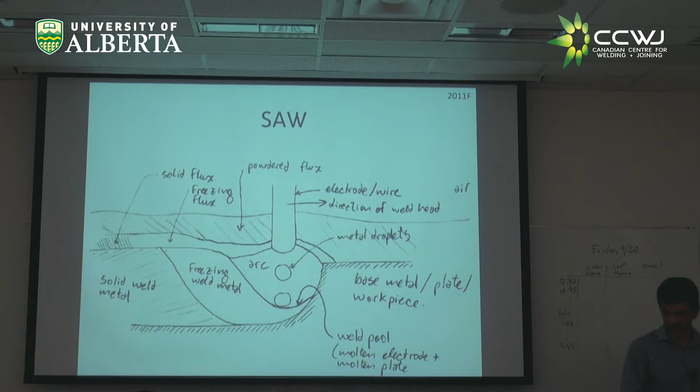For the grad students here, among other things, not only am I late, but when I was in a rush trying to get my hard drive, I left behind, I prepared a sheet. For the grad students, we need to assign projects for you. And with 2 of you, I already talked, but there are about 9 left.

So this Friday, tomorrow, I'm going to make myself available. And I would like to meet for 15 minutes with each grad student. Not you, because we already met. Not you, but there are many others. And I just want to get a sense of what you like, what's your research. The project is still going to be closely tied to the fundamentals you learn in the class. But if we give it a spin that is good for your thesis or things that get you excited, everybody is happier, right? So tomorrow from 10:30 until noon, and then from 1 until late in the day,

if you guys want to sign your name, like I asked Daniel to prepare this sheet, so I know what to expect. If for whatever reason you cannot make it on Friday, let me know. But if you can make it tomorrow, good, we get done with that. All right, and you can get started earlier. You might need to learn some of the material I'll teach later. But grad students are good, so it shouldn't be a problem. And it should be an awesome thing.

Very often, those things are really good hooks for future employment. Because you say, I did this. Oh, I cannot believe you did that. Oh, yeah, sure I did. So, all right.

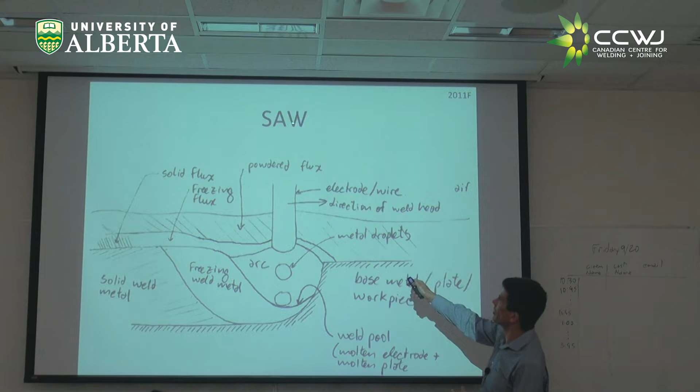And then we moved on and said, okay, fine. We have an arc, like TIG, but we're melting the electrode, like MIG, and we're protecting it with fluxes, right? And it's something that is new. And if it is fluxes, we talked about flux core, right? That we use the same machine as MIG. It looks everything the same as MIG, except you can get away without putting a gas, right? And you would have a good protection for the melt. And then we said, okay, there's something else similar to MIG and similar to flux core, that is submerged arc welding. So is submerged arc welding done underwater?

Oh, I see hesitation. No, it's submerged because it's submerged under fluxes, all this bed of fluxes. And I didn't get to show you some videos, but I'll show those to you today. So it looks like MIG in many aspects. You have a solid wire, right? You have the weld pool, the weld here, right? It looks like flux core too, in which the melt is protected by fluxes, right?

Flux core is always a tubular wire. Submerged arc welding can be tubular, might not be, right? So this here is just powders. And you will see all this in action. So this drawing, which is of my authorship, is somewhat artistic, but you're going to get to see the reality, right? And it's like flux core in the fluxes. The wire here can be many things, as long as we protect it with the fluxes. Now, the fluxes we can mix with metals, and we can make alloys. So we can make crazy stuff with this process.

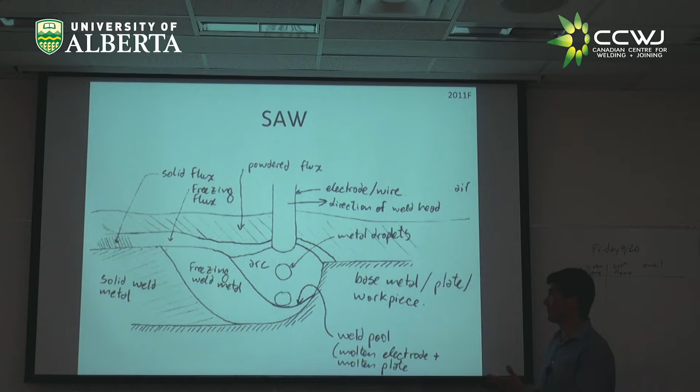So I mentioned to you something about how, since the fluxes have chemical reactions with the metal, you can add oxygen, you can take oxygen away, or phosphorus or sulfur, a bunch of things. So there's this term called basicity. I mentioned briefly to you that it is like a legacy from the steel-making industry, in which, depending on the chemical composition of the fluxes, they call it acidic or basic, but it has nothing to do with pH. I don't know why they call it like that. I asked. Nobody gives me a straight answer.

Yeah? It's just because it makes the ratios easier. It's just ratios. They just called it that because of the ratios. Yeah, but if it is just ratios, there are so many other ways to call it too, right? It's true. It's because of the ratios of different types of fluxes. Why acidic and basic beats me. But they're called that way. There's nothing to do with pH. Nothing to do with pH.

Something else is called neutrality. That means if you're going to have more, you're going to change your manganese and silicon content in your alloy. Now, as a preview, manganese and silicon are special because they are very reactive with oxygen. So if you have a plate that is rusty, you can weld on it without problem if you have an alloy that has high manganese and high silicon. Now you might say, why would anybody want to weld on a rusty plate? Well, the answer is everybody wants to weld on a rusty plate because it means you can store it outside and you save money without having a shed, and you can weld it without having to clean it. That saves time and money.

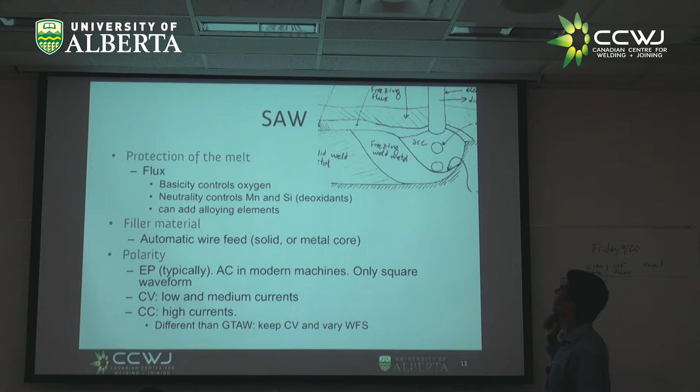All right, so subarc welding is, remember I said TIG is like a scalpel, MIG is like a knife. This is like a chainsaw, right? So it depends on what you want to do. Do you want to do brain surgery or you want to chop down a tree? You don't use the same, right? This is for chopping down trees, right?

You want to make enormous plates, you want to weld a ship, you want to weld a bridge. Subarc welding is the way to go. TIG, no. TIG is you want to make a race car, right? Very different type of things, although both are based on arcs, right? The only one that can make bigger welds than subarc welding is electrogas welding or electroslag welding.

Why do you think electrogas welding, which you know what it is, can be bigger than subarc welding? Why? Why can electrogas welding be bigger than subarc welding? Do you remember electrogas welding, more or less? Used to weld ships. Like subarc welding is also used to weld ships.

In electrogas welding, do you remember how we went? Like we would put these copper shoes and move up, right? And it's like a swimming pool of molten metal. So why subarc welding cannot be as big?

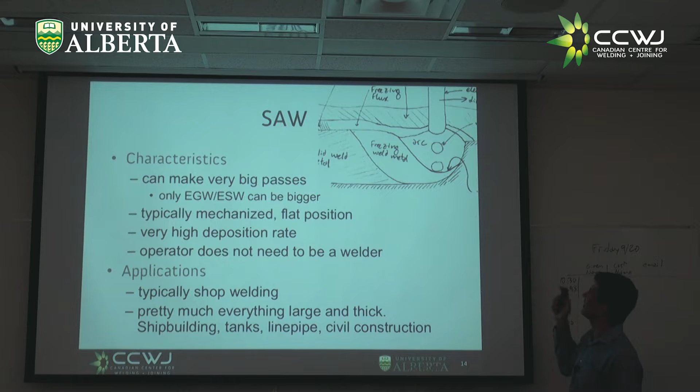Let me show you the video on subarc welding here. We're training videos. Oh, hold on. Wow, I'm having a special day today. Okay.

Thank you. Let's go.

I don't want to see any iMovie. Consumable. There we go.

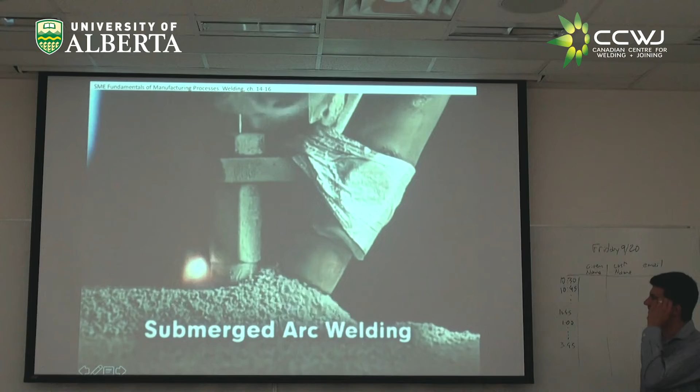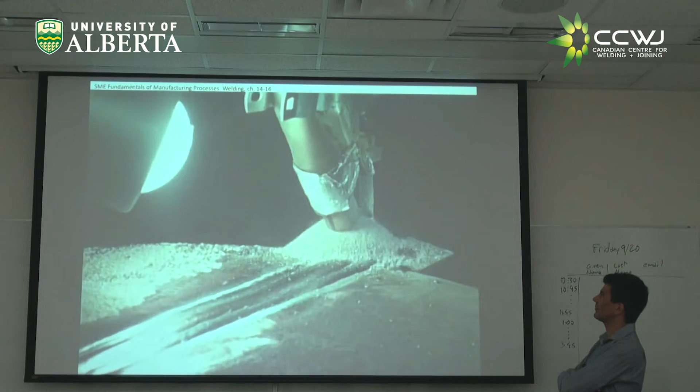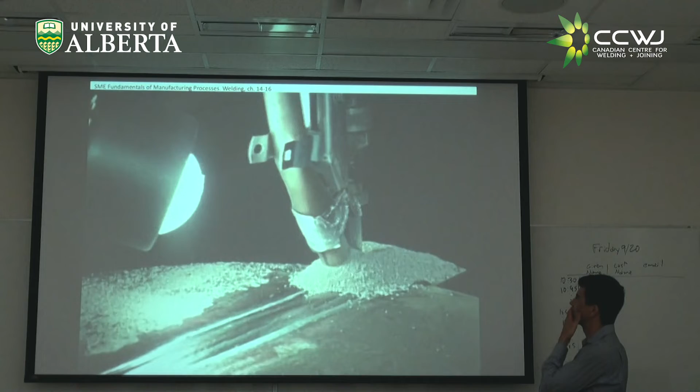In submerged arc welding, a bare, continuous, consumable electrode wire is fed under a layer of granular flux. When the arc is struck, the tip of the electrode is submerged in the flux, and the arc is not visible. Welding proceeds without the intense radiation that characterizes open arc processes, and with little fumes.

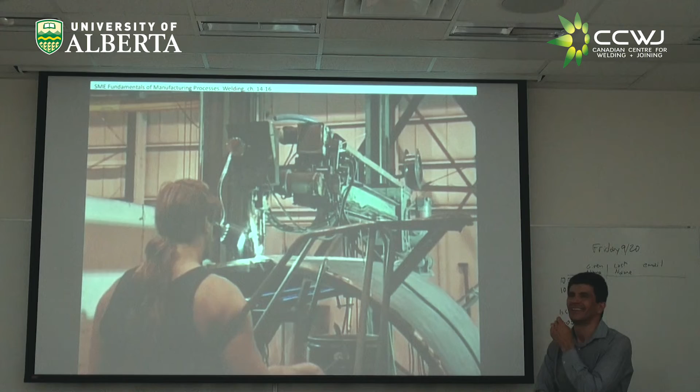The submerged arc welding process varies from semi-automatic to fully automatic. No safety glasses, no special jacket. It uses wire feed devices and joint tracking systems to move either the welding head or the workpiece.

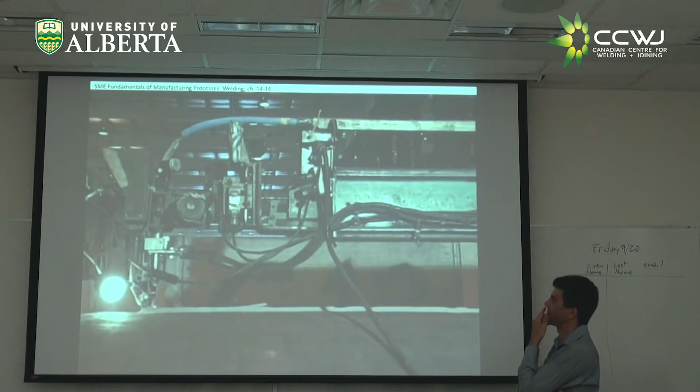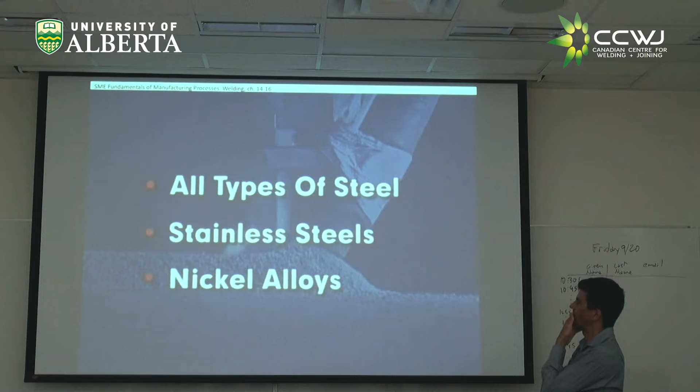Submerged arc welding is commonly used to join all types of steel, stainless steels, and nickel alloys. All right, awesome. So, steels, stainless, nickel. How about aluminum? It didn't say aluminum, so the answer is no aluminum. Why? Because it can be easily oxidized. Exactly. Thank you so much.

When you have these fluxes, there are chemical reactions. Fluxes are typically oxides. Well, aluminum will steal the oxygen from everything except titanium. So if you want to do subarc welding of aluminum, it's not going to work. So you might say, how about something that is not oxides, for example, fluorides? We have tried this in the lab, and every few years, people come with their grand idea of subarc welding of aluminum. That would be amazing, so useful.

But fluorides are very hygroscopic, so they absorb humidity, absorb moisture. And if you have moisture, then you have hydrogen, and hydrogen is very bad for aluminum too. It doesn't give you cracking like in steel, but gives you porosity. So subarc welding, which is super important, is essentially constrained to everything iron or nickel base, because of the reactivity of the fluxes.

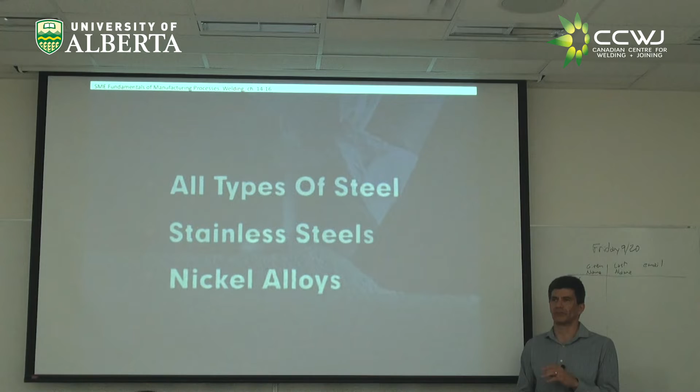Having said this, what do you think of flux core of aluminum? That doesn't happen either. That's another thing that every once in a while somebody comes with a bright idea. It's not happening. However, there are sticks. When we get to stick welding, there is one flux-based process for aluminum, but it's so uncommon. All right, let me show you. This is from our lab. So this is a machine you'll see.

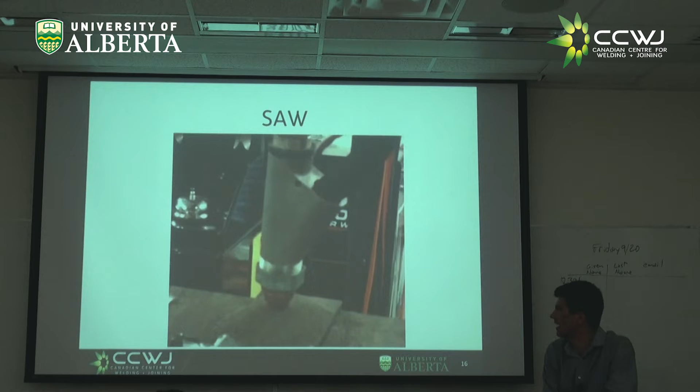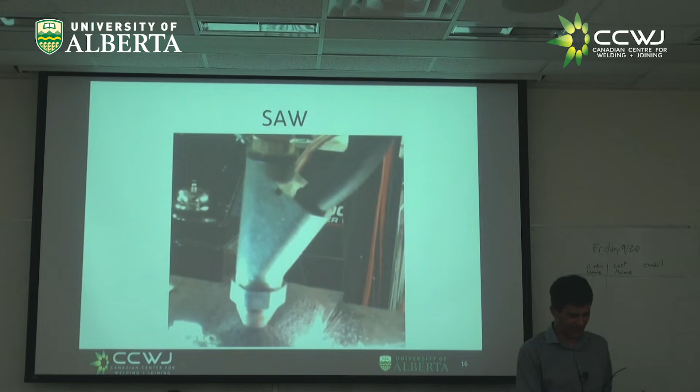You see, in our case, you see no flame. We didn't have a big flash to start. Okay, I should stop it here. That doesn't matter. That was part of an experiment. So, you see, we were doing something that I'm going to show you now. You saw that it was about to explode? That's why it looked like it was about to explode.

So, subarc welding is so similar to MIG. You have droplets that come from the electrode to the weld pool. Is that globular or is it spray? What is it? You have no idea because you can't have any idea. And nobody has an idea, but we do because we did these experiments in the lab.

So I'm going to show you a video that is a super big deal because some people in Germany had done videos like this in 1960, when was that? It was 50 years ago. I think it was 1968, or maybe earlier. And then nobody could do this again. But we did it. We had a guy coming from Germany, and in 1 week of working together, we did this. It's a major breakthrough.

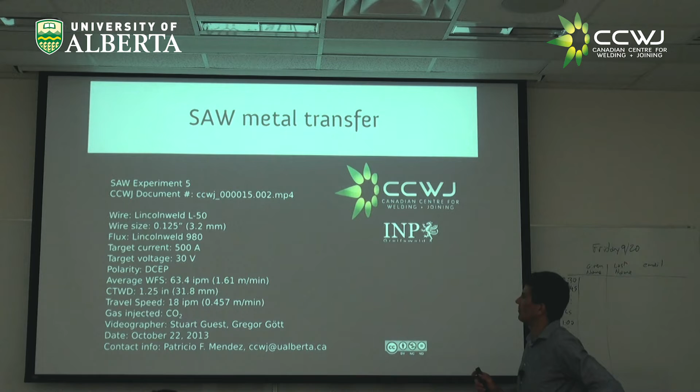So I'm going to show you a video of metal transfer in submerged arc welding. This is just to whet your appetite, because in a metal transfer lecture we're going to have, I'll show you much more. So metal transfer in submerged arc welding. So this is a droplet. This is a wire. This is 10,000 frames per second. So this has been slowed

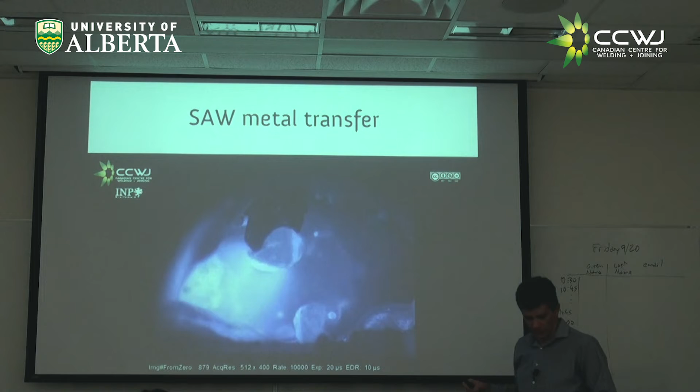300 times. This is 300 times slower than reality. This is a droplet. You see the wire now is molten here. Here you have the arc. Here you have the weld pool. This kind of thing you see is part of the trick we did, in which we put like a little tunnel to see inside. And when you start to see the sparks flying in the video that I stopped, it's because the sparks were coming out of that tunnel.

So now it's funny. To some extent, this would qualify almost like globular. You see the fluxes, the dry fluxes coming from the top. But you cannot compare this with globular transfer in MIG, right? In MIG was this beautiful big droplet, would go a little bit to the sides. But now this droplet is big, but it's not too beautiful. It looks like a horror movie type of amoeba monster, right?

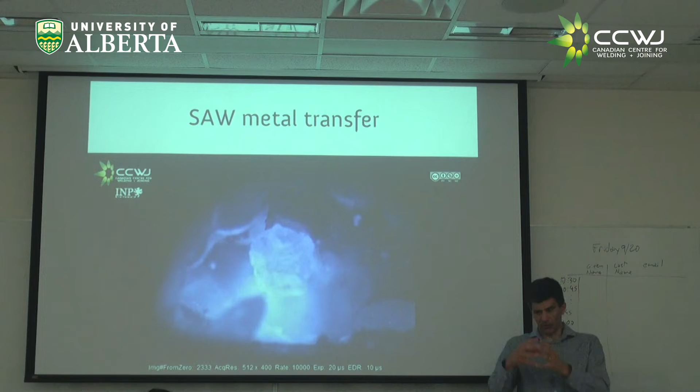So this is important because it informs us of many things. One is, how is the metal moving? Does the metal fall straight or make a bank shot against the molten walls of the fluxes, right? We also get to see what your arc length is, because you can set the contact tip to workpiece distance. Do you remember what that is? From the contact tip to the plate. You do that. But once you turn on the arc, you don't know how that distance is divided between arc and electrode extension. But now we know, because we're measuring it, right?

So we did so much scientific work with this. We got to learn so much. And then, not too far after we did this, some submerged arc welding machines started to come with waveforms. But to develop a waveform, you need to know what's happening to the droplet, right? And they wouldn't do it because they have no idea what's happening to the droplet. So I don't know how much use they put to our videos, because in industry they're very, very secretive.

Let me tell you an interesting story about this. I visited Japan for a conference a couple of years ago. It was after we published this paper. And I'm happy in my conference in Tokyo, and they said, would you like to come see our company? Yeah, sure, why not? Okay, now they put me in a car where they kidnapped me. They take me to one place that was an hour and a half away from Tokyo. And they put me in front of this welding machine, right? A sub-arc welding machine.

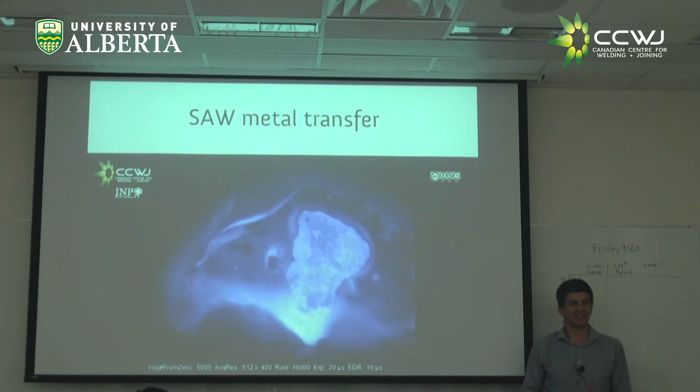And they start asking me all kinds of questions about this experiment. It was funny. I felt like being interrogated. But that means that somebody once cared about one thing we did in the lab, right? As an academic, that so seldom happened. So I was very happy. But this is a big deal you get to see here.

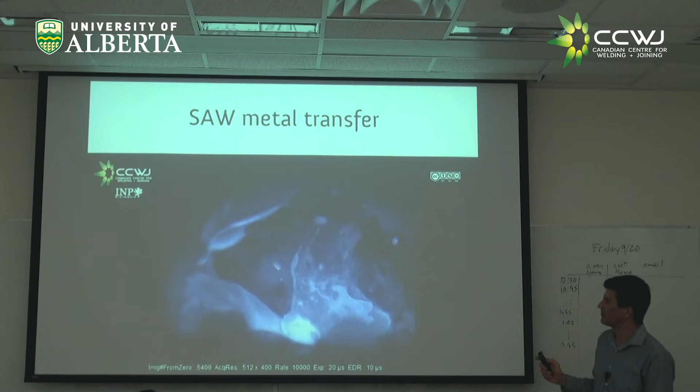All right, true or false? False. If you remember, sub-arc welding is massive, right? It's a chainsaw. MIG is like a knife. Very, very different, although they're so similar. And again, everything has an exception. If you wanted to do submerged arc welding at 400 amps, yeah, you can do it with a MIG machine, right? It's not designed for that, so you have a few challenges, but not insurmountable. Similarly, you can do gas metal arc welding with sub-arc welding, right? But again, the machine is not designed for that. You can make a gas nozzle, but it's never going to be as good. And if you say, well, but I wanted to do it at 1,000 amps, I say, good luck with your shielding, because you're going to have this enormous tail that you cannot shield with the gas. So things are there for a reason.

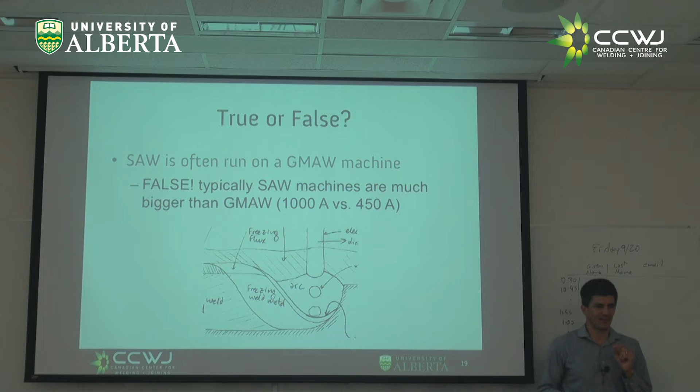So as you see, for everything I tell you, you can prove me wrong with one example. So I cannot give you a universal law for things. I can only talk about typical things. Here you have an exception. Isn't that cool? So you can do anything you want with welding. Yes, as long as you can pay for it.

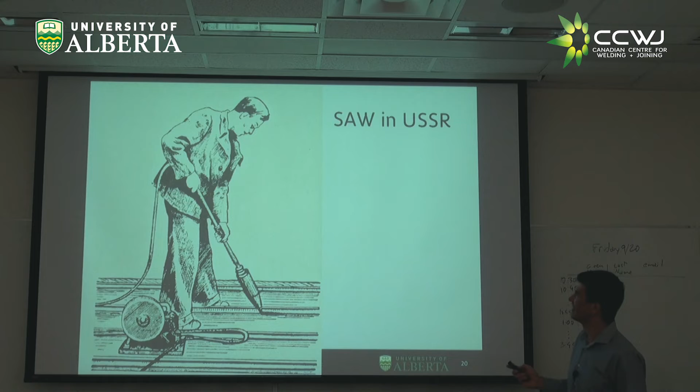All right, electroslag welding. So now, electroslag is to electrogas what subarc welding is to MIG, right? So MIG, I melt a wire, cover with gas. That's same as electrogas. The difference is one is enormous and one is controlled. One is a swimming pool with 4 sides, and the other is controlled by capillary forces.

Electroslag welding is the same as submerged arc welding, except it's massive. So you make this swimming pool of weld with 4 walls. Now, that wasn't completely true. There is one difference between electroslag welding and submerged arc welding, and it's very important.

You have fluxes. You have a slag, you have molten metal, you have the copper shoes. Same thing. The fluxes are the same as submerged arc welding. However, electroslag is typically classified as an arc welding process, and that's why I put it here. Guess what? You have no arc. No arc. But you still run current.

It happens that some fluxes, when they are very hot, become electrically conductive. So you run the electricity from your electrode to the molten metal, and you melt the wire, just as you did with MIG or anything else. But you have no arc. So fluxes that would give you this type of performance are very high in fluorine, or fluorides, which are not oxides.

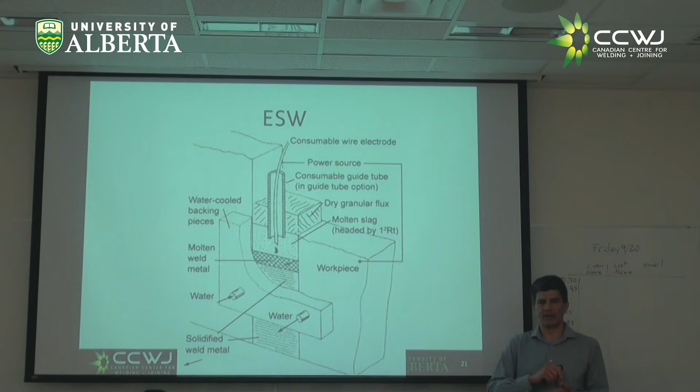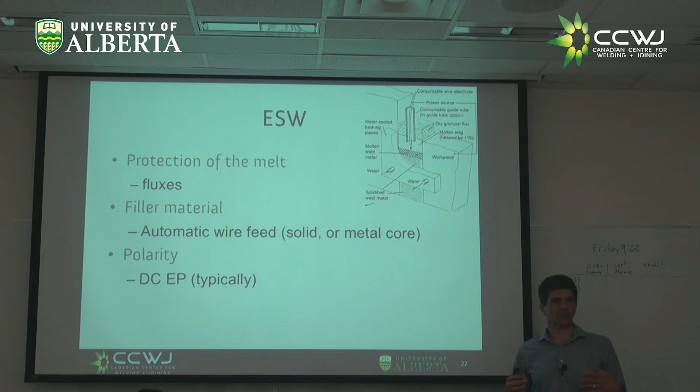In a single pass. You can weld enormous welds, making many, many passes, but in this one, you get to do it in one pass. So protection of the melt is fluxes, not a gas. You have automatic wire feed, which can be solid or metal core, and the polarity is typically electrode positive. This is a common welding procedure for enormous things, like I mentioned before, ship and bridge construction. This is not a weird process. This is used.

What else? All of this is mechanized, with a very high deposition rate. The operator does not need to be a welder. Same as I mentioned before, an operator is to a welder what the DJ is to the musician. How many of you are DJs here? You can raise your hand.

Well, they have a thin skin when you say you don't play music, you play a button. I play music, I'm horrible though, so I should stick to playing buttons.

Again, as you know by now, if you have a huge weld, it's a huge amount of heat that takes very long to dissipate, giving you a huge heat-affected zone and very high heat input. All right.

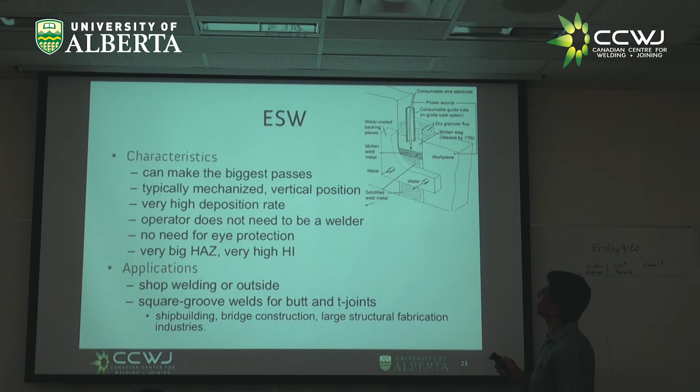Stick. When you go to welding school, the first thing they'll teach you is what I'm teaching you last, stick welding. The reason I'm teaching it last is that it's relatively easy to do by hand, but we need to have built many things to explain it. To some extent it's complex because you're melting an electrode, so it's a consumable electrode. The physics is more difficult than TIG.

You have fluxes, like we had in flux core. You have the weld pool and all those things. But in addition to that, it runs out. It's a stick, a rod of finite length. It's not like a spool that looks infinite because you keep on spooling. So this is the process you might have typically seen, and you will do this by hand yourself in the lab. They give you a stick, and it's very difficult to make work, but once you get the hang of it, it will be good.

When I was a little kid, my dad built 2 campers, and he taught himself welding, and he taught me some. So I thought I was so awesome. I could do some of that. But I should not weld anything that goes under pressure, that for sure.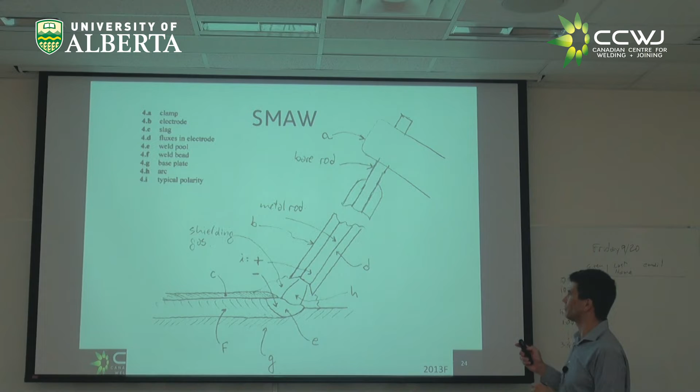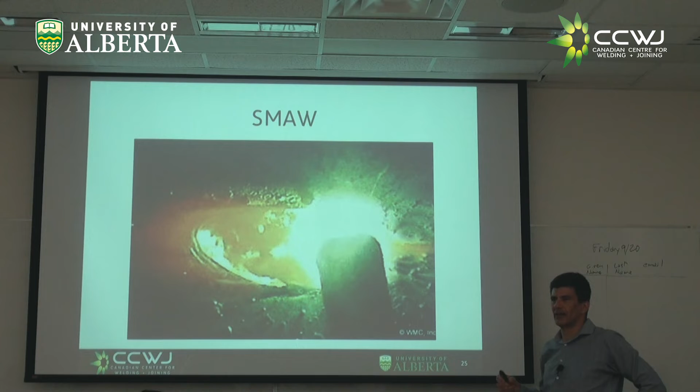You saw this photo in the first class, right? Here we have the electrode. Here you have the arc. Here you have the weld pool. Could this be TIG? Well, it could not be TIG because you see this enormous arc, and TIG typically is sharp. You will see that. I don't remember, but we might be seeing that today, and if not next week, for sure. Could this be MIG? No, it cannot be MIG because in MIG the wire comes perpendicular, or in stick you come at an angle. It's very different.

So protection of the melt in these cases is with the fluxes. Remember I mentioned this word basicity before. That has nothing to do with pH, and it's not even all too scientific. But people have this general heuristic, like a rule of thumb, that depending on the type of oxides you have, you're going to have higher or lower oxygen. When it's cellulosic, you have higher penetration. Nobody understands exactly why, but the cellulosic have what they call a very stiff arc. I believe it's because the arc of hydrogen is quite constricted. But for that, we need to do more work on the science of plasmas. But if it has penetration, then people use it for things when you need to go deep. The filler metal is rods, not wire.

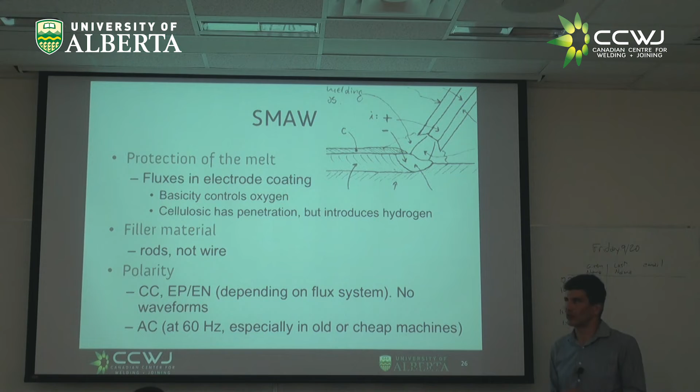Now, because you guys haven't had much of electrical engineering, transformers only work on AC, right? Transformers don't work on DC. That's why Tesla was successful where Edison wasn't. Edison was working in DC, and he couldn't transport electricity at long distances. Tesla would make transformers, increase the voltage, lower the current, fine. Transformers work on AC. If you work on AC, you are going to be positive sometimes, negative sometimes. You're going to be 0 sometimes. We're going to discuss. When you go through 0, it's kind of hard to maintain the arc at 0 current, right? So all these things come to play roles and result in commercial products.

Characteristics. Well, stick welding is super versatile. This is only manual, but again, there are exceptions. I've seen it in a shipyard in Japan. They make these huge rods that you could not possibly use by hand. They put it in a slider, so as the rod is burning, it keeps moving by itself, right? So everything has an exception, but here in this province, typically we do it manual. The skills to do this are higher than MIG, but lower than TIG. TIG is the most difficult. MIG is the easiest. Stick is medium.

The deposition rate is low. This is not a very productive process. Now, there's a difference. TIG is not very productive because you're with a scalpel. This is not very productive because you have to stop, grind, right? Get the other electrode, put in the clamp, do it. Welders, like in the pipeline industry, they're a little bit like surgeons. The guy is welding, and right next to the guy, there's another guy with a bucket of electrodes just waiting to give it to him.

In 2008, when I got this job here, our economy was flying super high. At McDonald's, you could not find anybody older than 15 because anybody who was older than 15 was holding a bucket of electrodes for $100,000 a year, right? We don't have that problem anymore. So, but it's not very productive. Cannot make too small details. You can end up with high hydrogen, for example, in these cellulosic electrodes. Cellulose, right, is an organic material. Carbon, oxygen, nitrogen, hydrogen, right? And the hydrogen is a problem. The equipment is super cheap. It's just a transformer. It does not get any cheaper than that.

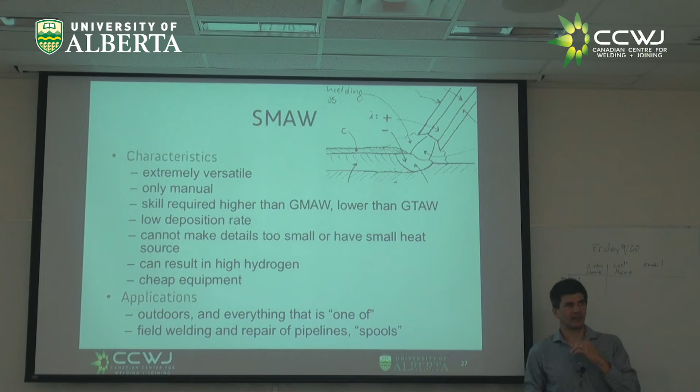Applications. Outdoors, for sure, right? Because now my protection is a flux. Everything that is a one-off, we're good. Field welding, repair of pipelines, spools. Civil construction. If you're going to be climbing to the floor number 100 in a tall steel building, do you prefer to have your stick electrode, or you prefer to carry a tank of argon and all those things, right? Of course, the guys go with the stick electrode and get done, right? There are good reasons to use this. So don't get me wrong. It's not that this is bad. It's bad when you use it, but instead you should be using something else. And that depends on awareness. Are you guys fine? All right.

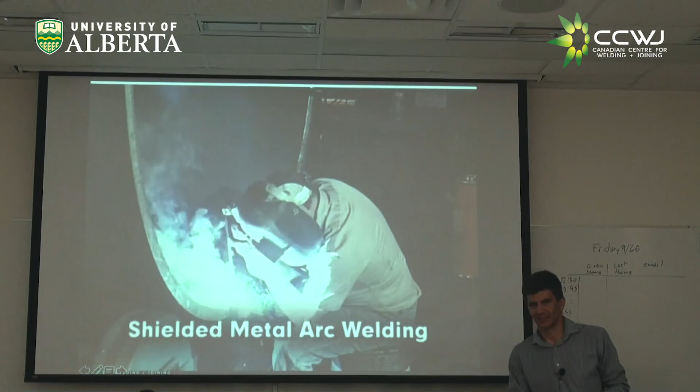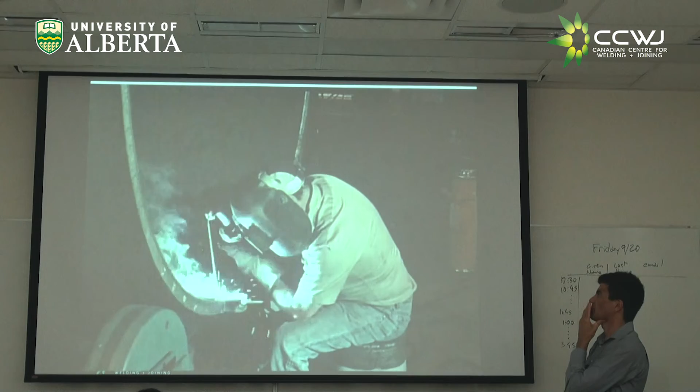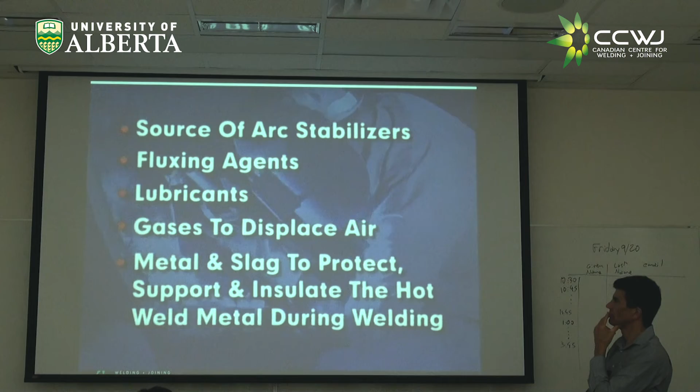Oh, here is our training video. Shielded metal arc welding uses a covered electrode consisting of a core wire surrounded by a concentric covering, which is a mixture of silicate binders and powders. These binders and powders serve as a source of arc stabilizers, fluxing agents, lubricants, gases to displace air, and metal and slag to protect, support, and insulate the hot weld metal during welding.

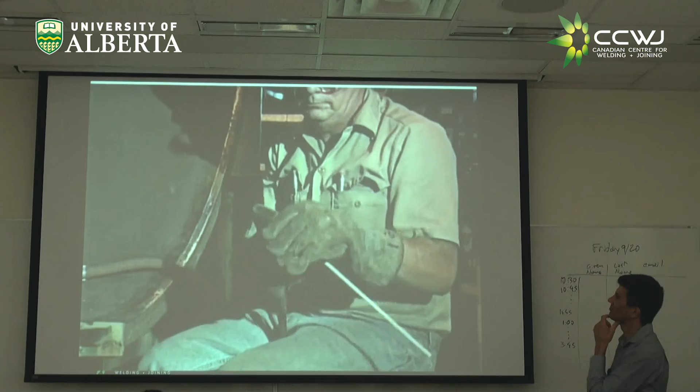The bare section of the electrode is clamped in a holder, which is connected by a welding lead or cable to a terminal of a constant current power source. The workpiece is connected to the other power source terminal.

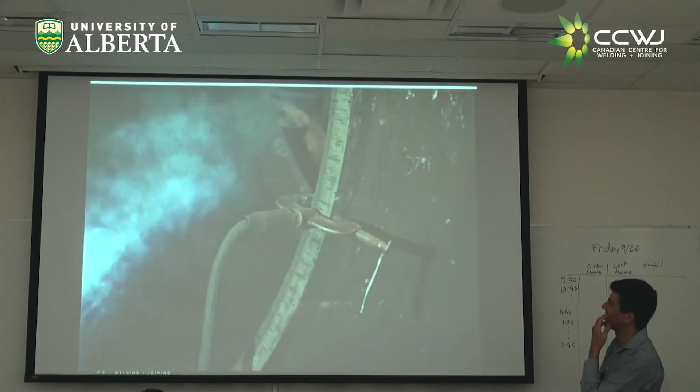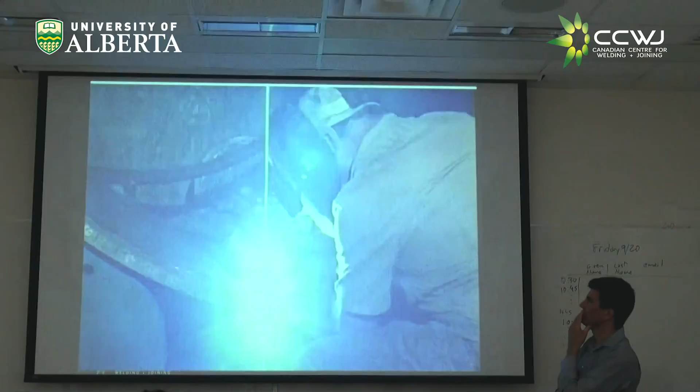Touching the tip of the electrode against the workpiece and withdrawing it slightly initiates or strikes the arc. The heat of the arc melts the base metal in the immediate area, as well as the electrode core wire and covering. The molten base metal, core wire, and metal powders in the covering coalesce or fuse to form the weld.

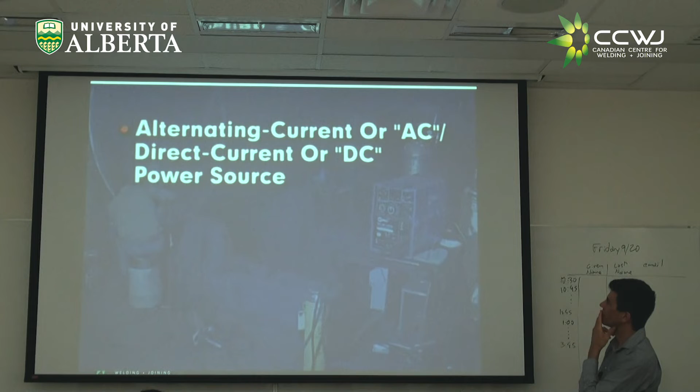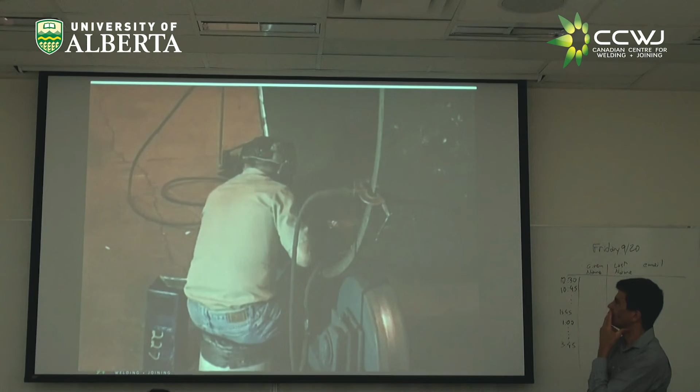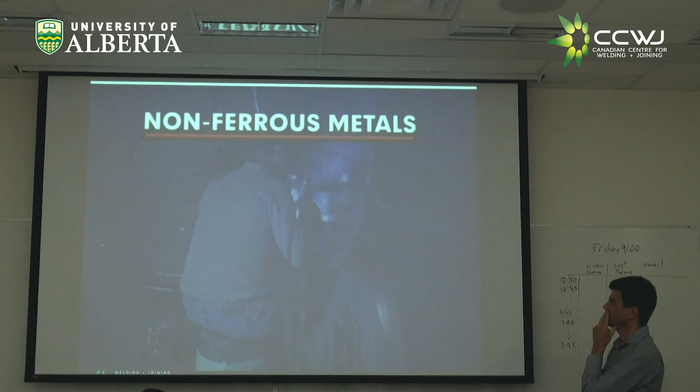The equipment required for shielded metal arc welding includes either an alternating current, or AC, or direct current, or DC power source, welding leads, an electrode holder, welding helmet and gloves, and protective clothing. The process is effective for welding ferrous metals such as cast iron, carbon, low alloy, stainless, and tool steels, and non-ferrous metals including copper, nickel, aluminum, and their alloys.

Let me tell you about aluminum. I talked with the person who developed the aluminum stick electrodes, right? And those are heavy in fluorides, right? We said we don't want to use oxides. They are a nightmare because fluoride is not all that different than, for example, a chloride. Like sodium chloride, like table salt, right? Have you ever seen how the salt cakes in your salt shaker sometimes? That means it absorbs lots of moisture, right?

So there are stick electrodes for aluminum. If you can use MIG or TIG, you'll be a lot happier. Sometimes you gotta do what you gotta do. Did you see when they show how you start the electrode? Some people joke that's why it's called a stick electrode. Let me show you.

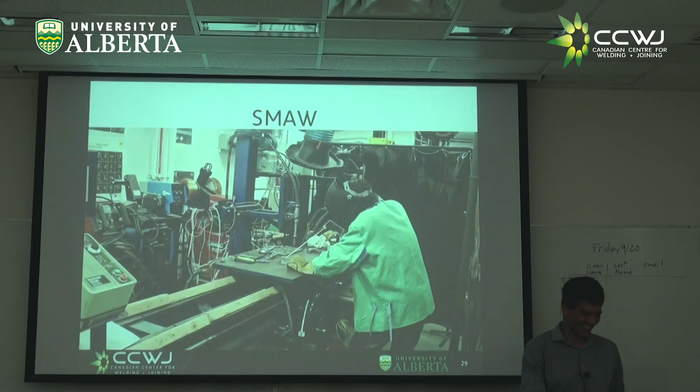This is in our lab. That's a stick electrode, right? So you got to see how it sometimes gets stuck? Don't laugh too much now, because you'll see when you try yourself. It's quite tricky.

But once you master it, it's exhilarating because you can start putting things together, right? You start having your very own industrial revolution, and then you go to Home Depot and you spend a couple hundred dollars, you get your own welder. You can do everything. It's awesome.

If you use the stick electrode, does it give the same strength compared to the other method you were explaining? The other procedure. Okay. The question is if the stick electrode would give us the same strength. So many important things to bring up here. Again, which one is more likely to have defects? Okay. Two questions. One, you asked us about strength, right? So the answer is yes.

But strength is the easy part. Making something strong is very easy. It might not seem so obvious, but making something strong is easy. You want it strong and tough. That's difficult. Glass is very strong. I would not make a pressure vessel out of glass because it's fragile and it could burst, right? So I'm not talking about the strength as in... You're talking about mechanical properties. Quality.

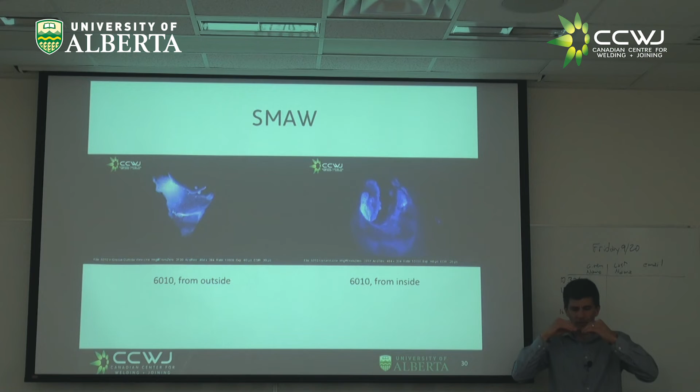Right? In this case, they are doing a root pass of a pipe. And 6010, which is a strong arc, they use it to make sure they melt the bevels, the root of the joint preparation, right? So they would not have a problem of lack of fusion. So here you're essentially seeing the weld from below.

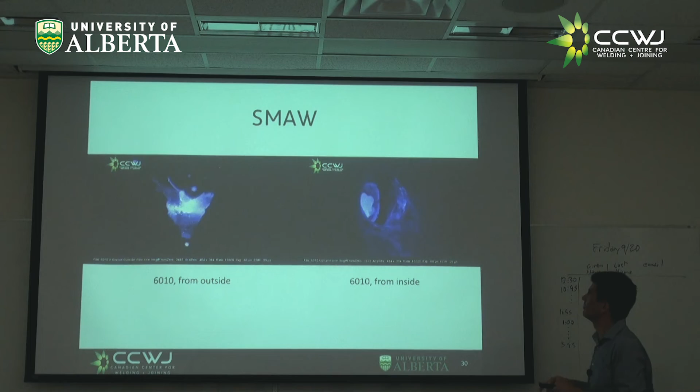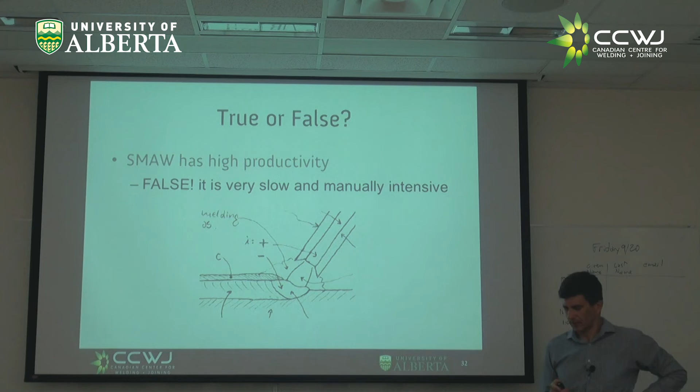If I'm doing subarc welding, right? It's like painting a line with a brush. But if I do strip cladding, it's pretty much the same, but I'm coming with a roller, right? You go with this wide track, roller, much wider, much more productive for doing cladding, right? For overlays.

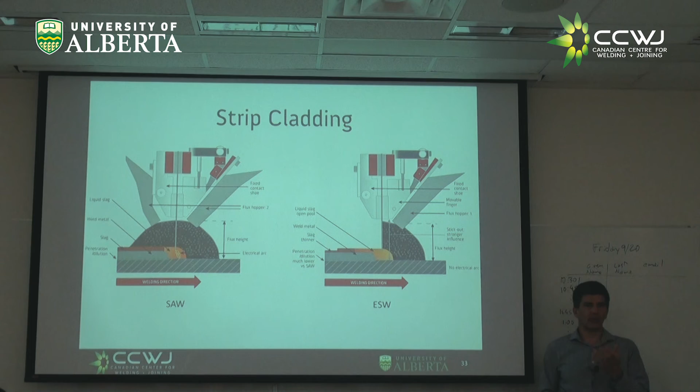So this dilution is marked here, right? And although there are formulas for this, you intuitively know that if you're going to melt a lot of the base metal, you're going to have lots of dilution, and you want low dilution. So the advantage of electroslag welding is that the dilution is lower than in submerged arc welding. And one of the reasons is that in submerged arc welding, the plasma arc puts a lot of heat here on the plate, while in electroslag welding, it puts much less heat because you don't have an arc and the problems of the arc.

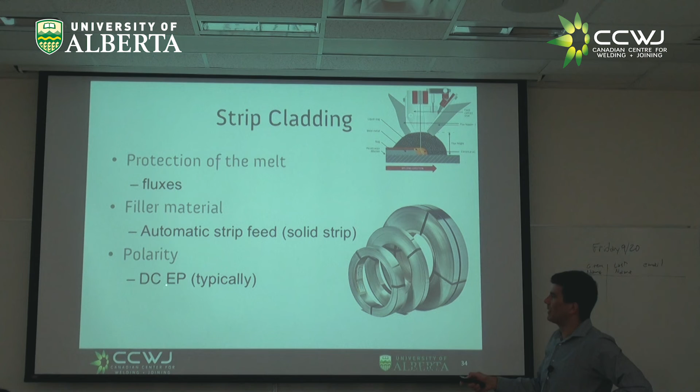So strip cladding: the protection of the melt is fluxes. The filler metal is a strip. You see, these are the rolls. This is not wire, these are strips, right? Polarity, typically electrode positive. Can make wide passes. Typically mechanized, and I never heard of doing it any way that is not mechanized. Much the same things as subarc welding. The dilution is low. Subarc welding with a wire gives you high dilution, right?

This strip is very wide. Sometimes the current is actually not divided evenly over the strip. The current goes like a zigzag, like you have these points of current. Whatever is closer is what keeps the arc, and then once you consume all this, it comes back and comes back and comes back. At the very edges, you have this pinch force that can cause an undercut. And this is a word I didn't mention. It's the first time I use it in this class.

Undercut is this. Imagine I have a plate. This is a cross-section of my weld, right? Ideally, you want the toe to be right on the surface, but sometimes it's under. This is called undercut. People also call it, when they do this same problem with 6010 electrode, the wagon tracks. Like the wagon tracks here. And of course, when they come and grind all of this, that's how you end up with negative efficiency.

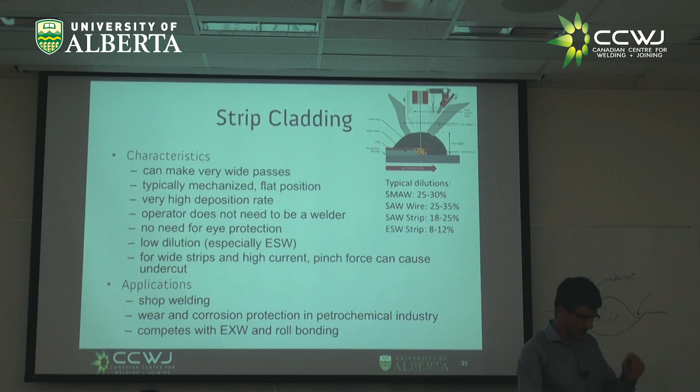This is a shop welding operation. Applications: wear and corrosion protection. In the petrochemical industry, we do it much. This competes with explosive bonding, and I will show you explosive bonding in the next slides. So this is for arc welding processes with fluxes. Do you guys have any questions or comments on it?

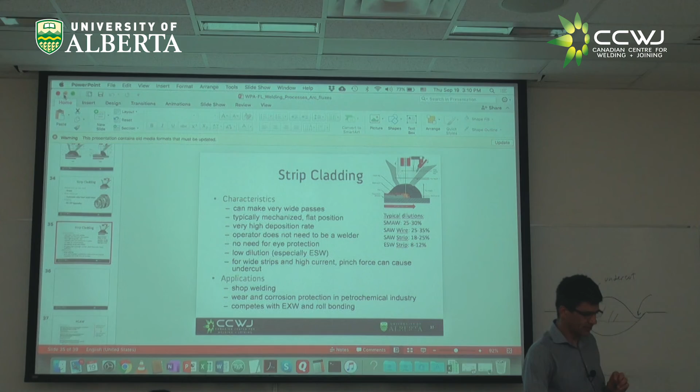As you see, welding is a whole world. We used to have a class only of processes, but we're going to do so much more than that. I want to show you solid state processes because we're going to be demoing those soon. All right.

So when we talked about classification of joining processes, we said permanent and not permanent, right? Not permanent would be bolting. If it is permanent, it's because there was rapprochement of the atoms, and the rapprochement meant the atoms would have a chemical bond, so they would start sharing electrons. That could happen in two main ways. One is you heat it up so much that it melts, and then everything is molten and goes solid and becomes one. Or the other, it doesn't melt, but in solid state, you hammer it, you put enough pressure and temperature until the rapprochement happens because you beat it to death, right?

So we have been talking so far only about fusion type of processes. I want to make a parenthesis. I'll pick up on fusion processes again, but because we will show you some of these solid state processes, I want to show you now. So this is rapprochement by fusion.

One is friction stir welding. We have a machine. We're planning on running it for you to see. This is the way you weld rockets. This is the way you weld the aluminum deck in military ships or ferries. Or this is the way you weld trains in Japan, the high-speed trains. So this is a big deal. And this is a process that was invented in the 90s. It's the newest mainstream welding process, right?

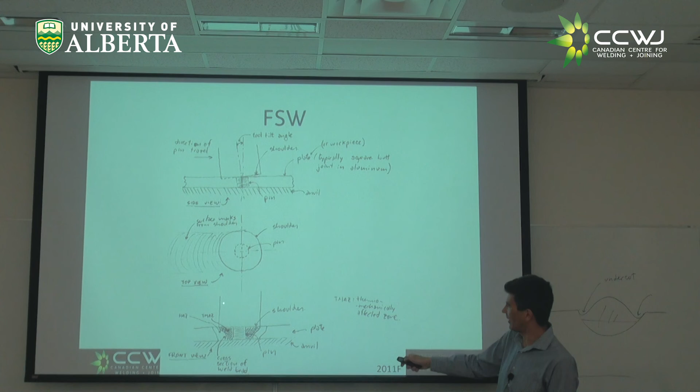So here you have the shoulder, because this metal is not molten, but it's very soft. It'll want to squirt out, right? But you pin it with the shoulder against this anvil, and you go. Because there is no melt, you don't need protection. First happy thing. You don't need filler metal. This is autogenous, right? I have no filler metal. People are trying to do all this kind of crazy stuff, but for the most part, no filler metal. The mechanical motion is rotation and translation, right?

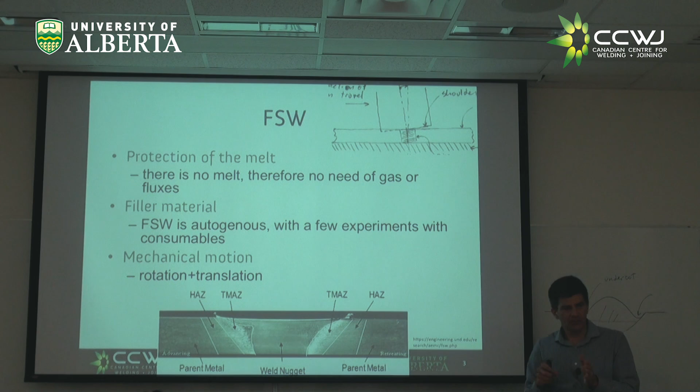And when you see a cross-section, it looks very different than a fusion weld, because you have the parent metal, the base metal, and a heat-affected zone. In addition to the heat-affected zone, you have a thermomechanically affected zone. That's new, because when you melt things, you don't have thermomechanical actions, right? And they call the weld nugget where it was moving. Why is this not symmetric? Well, when you're spinning and moving, one side is called the advancing side, it spins in the direction of motion, and the other spins back, right? So that gives you an asymmetry. That's not a problem.

So with this type of process, you imagine, I keep mentioning aluminum because I can use a steel tool. The aluminum gets hot, but the steel is still going to be strong. Now, what do I use for steel? Not trivial, right? You can use tungsten, you can use ceramics, but steel is a big nightmare. It has been done, can be done, is not frequently done.

These can weld unweldable alloys. So something called weldability means: can I weld it or can I not? Really, weldability doesn't mean anything too concrete, but you ask, can I weld it or not? Very often, the answer is no, you cannot weld it.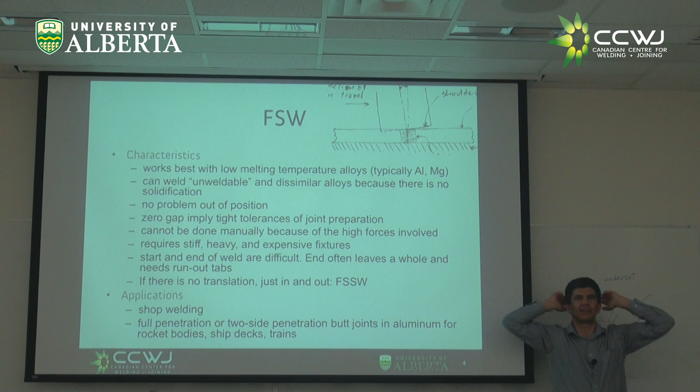This is an awesome story. To build the space shuttle, it has this huge orange tank. The great minds realized that if you mix aluminum with lithium, a very light metal, it's going to make a light alloy, lighter than aluminum, and you would save, I don't remember how many hundreds or thousands of pounds. Everything you save in your tank is something you can put inside the space shuttle. That's awesome, what a great idea. Let's make these tanks. Well, you cannot weld them, because you have all these issues that end up resulting in cracking, hot cracking during welding.

So the problem had two stages of solution. One is, how about if you make a tiny weld, a very narrow weld? Here in Canada, people developed a process called variable polarity plasma arc welding, VPPA, that could do it. The Chinese used that same process to weld their space station, for example. But then there is a second stage of development that was friction stir welding. Today, the bodies and tanks of most rockets are welded with friction stir welding. This is pretty cool. It was an enabling technology.

Now, because it's a solid state process, you don't have problems with gravity, because there's no liquid that is going to fall on you. But you cannot do it manually because of the enormous forces, so you need a strong anvil and a strong machine. You're going to see the machine we have in the lab. It's an enormous converted milling machine, super heavy.

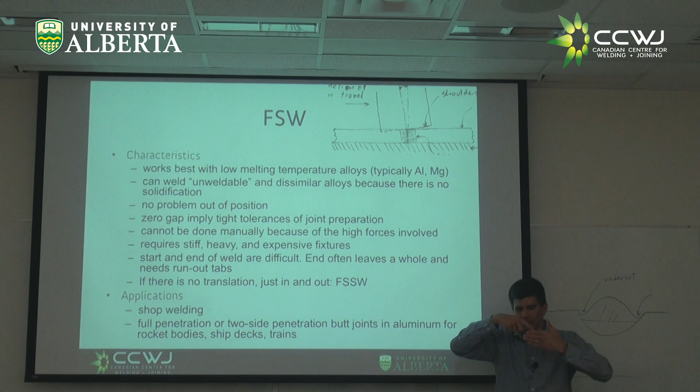As I was talking about the stirring, you realize that you cannot have a gap. If you have too big of a gap, as you stir the material, you're going to create a mess with porosity because you're missing metal there. It's autogenous. In autogenous welding, you typically want no gap. Because if you have a gap, guess what? There is no filler to make up for it.

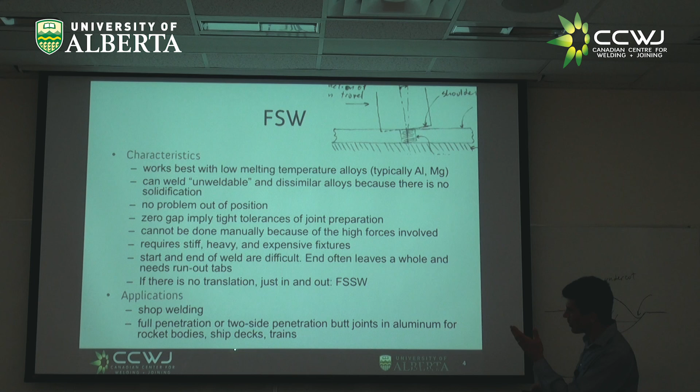Sometimes, instead of moving along, you can go in and out. This is called friction stir spot welding, and it's used in the automotive industry. Not widely used, but it is used, especially when you have aluminum components or you want to mix aluminum and steel or aluminum and magnesium. It's shop welding, not a field welding type of thing. Typically, this is full penetration butt joints in aluminum rocket bodies, ships, the things I mentioned to you.

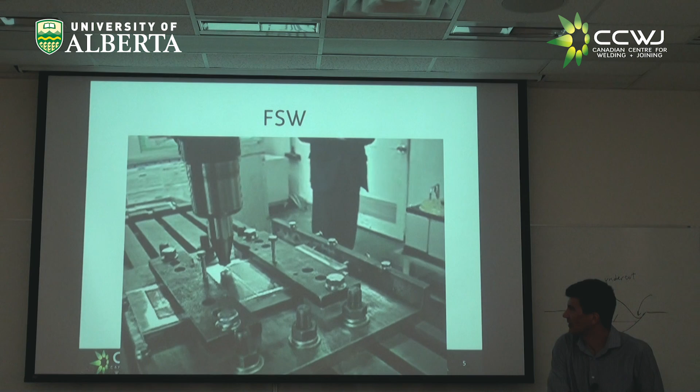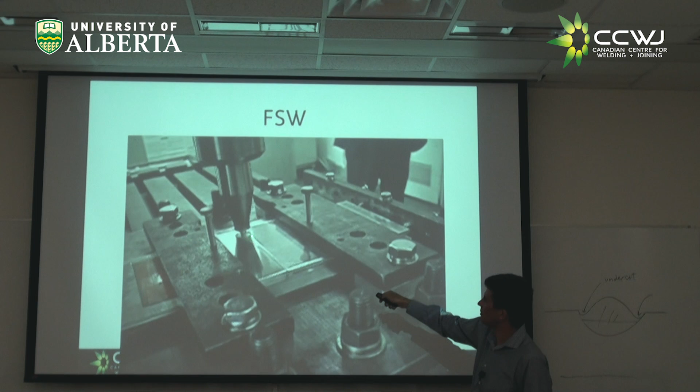I'll show you one video here, and then we'll stop. This is a video of friction stir welding. We didn't make this one. This is rotating. It doesn't look like it, but it's rotating. So it's doing what is called plunging. You're going to see it goes down. There you go. It goes down and will start moving.

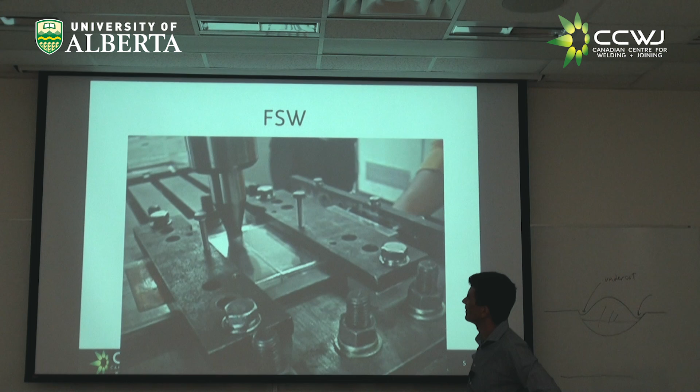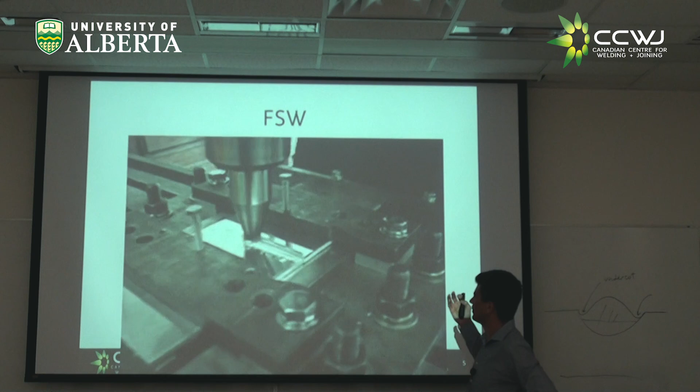So this is a video from some university. We should make our own. There's a little bit of a burr that you have to clean up later. But you see, this is all clean, all together.

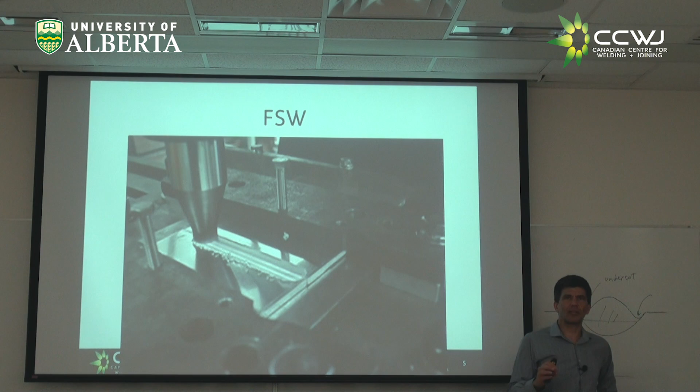So let's stop here because we're going to, on Thursday, yeah, we're going to the lab.